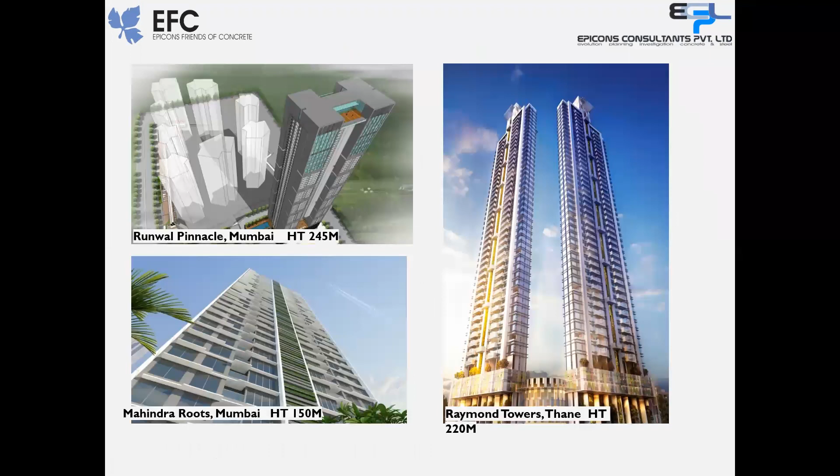Now I would like to introduce you to the director of Epicons, Anand Kulkarni. He graduated in 1987 with specialization in structures, and studied for post-graduation with a specialization in structure at SPCE. He has 34 years of vast experience in the field of structural design of various types of structures - residential, commercial, industrial, malls, multiplexes, etc. His expertise includes designing of tall buildings. He's involved in designing more than 110 tall structures ranging from 100 meters to 250 meters in height for leading developers. He's also a member of the American Concrete Institute. Some of the projects he has worked on are Runwal Pinnacle Mumbai, Mahindra Roots Mumbai, and Raymond Towers Thane.

Now I would like to introduce you to Ravindra Deshpande, sir. He graduated from VJTI Mumbai in 1976 with first class honors and then completed his master's in the same college in 1982. He's been working with Epicons since 1985 and has been the director at Epicons Consultants Private Limited for the past 28 years. He's acted as an external examiner for PG students of Mumbai University. He has attended a training program on seismic design of RCC structures conducted by IIT Kanpur in 2001. He's handled many industrial, commercial, residential, and institutional projects.

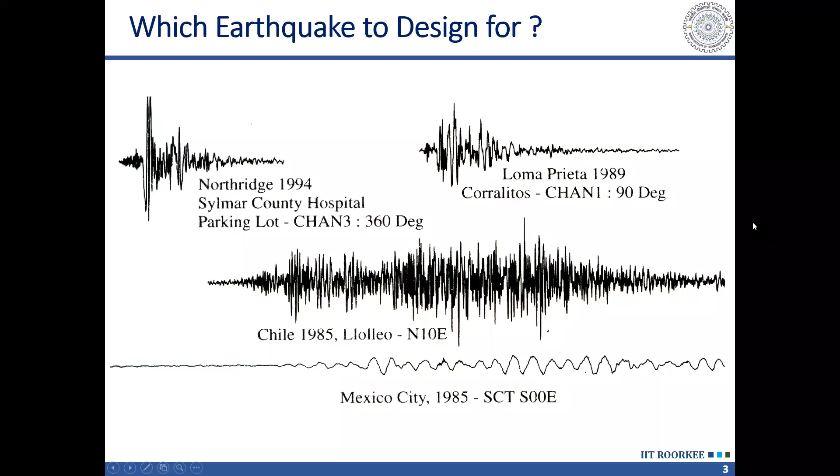This creates a problem for us, which we handle by identifying the major characteristics of earthquake ground motions. There are basically three characteristics which we can use to classify and characterize earthquake ground motions. One is the amplitude of the shaking.

Amplitude of shaking is represented in terms of peak ground acceleration, peak ground velocity, or peak ground displacement. As the term suggests, it is just the peak record. So when recording acceleration at the ground surface, whatever is the peak acceleration recorded, we call it PGA. This is the most important parameter in our design, and is represented by the zone factor in our code. We will talk about this later in more detail.

Then another important parameter is frequency content. If the structure has a period within the predominant frequency range of the ground motion, there will be a quasi-resonance-like phenomenon, and as a result the structure will be subjected to higher response and higher damage. On the other hand, if my structure has its period far away from the predominant frequency range of the earthquake ground motion, then the response will be reduced.

We take advantage of this phenomenon in base isolation, because in base isolation we make our structure quite flexible. We elongate its period to such an extent that it falls outside the predominant frequency range of the earthquake, and as a result much less energy is imparted to the structure.

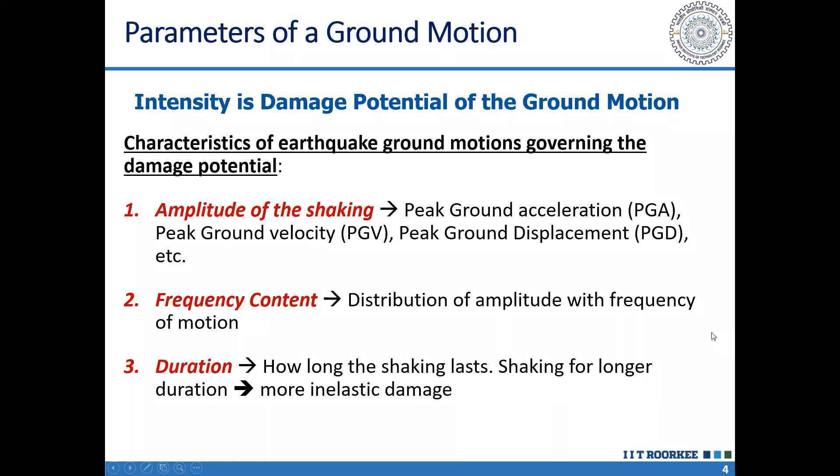The first two characteristics of ground motions, the amplitude of shaking and the frequency content, together can be represented in terms of response spectrum. Most of the time, as designers, we deal with response spectrum rather than ground motions. Codes also provide design response spectrum. The code does not provide any ground motion for which we have to design, but it provides response spectrum.

So a little bit about the theory behind this response spectrum. Response spectrum is nothing but a plot of response of single degree freedom systems, a series of single degree freedom systems. These are the simplest structures. We can think of single story buildings, which can be represented by one mass lumped at one point, having a single mass and a single stiffness.

So these single degree freedom systems are of different periods, shown here by different heights. As the height of the single degree freedom system increases, the period also becomes longer. A taller structure, even if single story, will have a longer period. A shorter structure will vibrate at higher frequency, or with shorter period.

When all these single degree freedom systems with different periods are subjected to the same ground motion, their response is very different, because the response depends on the tuning of the period of the system with the frequency content of the earthquake. As a result, we get a variation of response, and if we plot that variation with period, we get a curve, which we call the response spectrum.

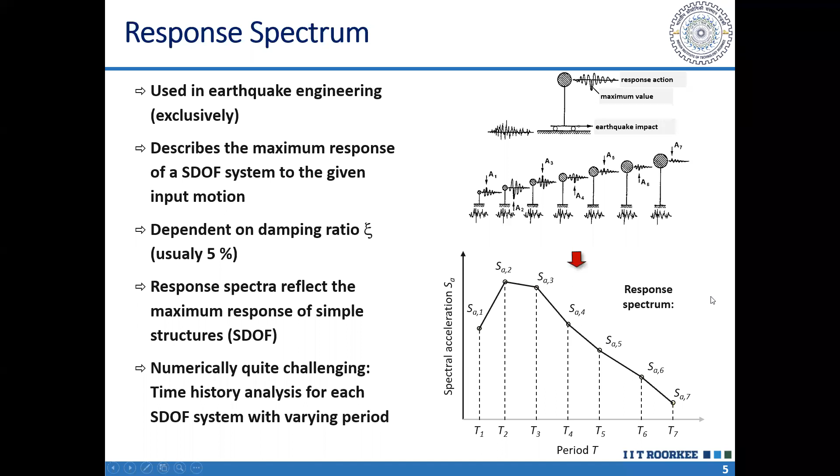How we utilize it for analysis of multi-degree freedom systems, I will talk slightly later. But response spectrum in itself gives us the response of a single degree freedom system, which is something analogous to a single story building. So let us look at the response spectrum, displacement response spectrum, for a single earthquake.

This plot I have taken from A.K. Chopra's book, for the El Centro earthquake. We can see that with period, the displacement of the single degree freedom systems goes on increasing. As we have seen, as the period increases, our single degree freedom system becomes taller, more flexible, and its displacement goes on increasing.

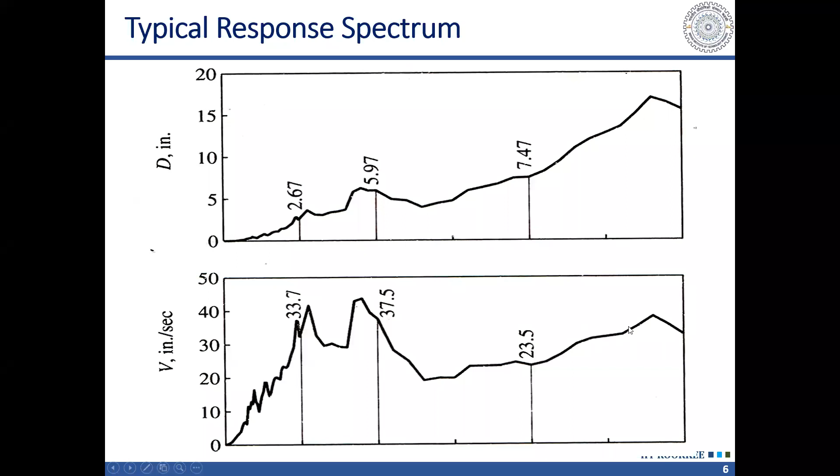This is of great help to us. This phenomenon provided by nature helps us in designing tall buildings, because if this was not decreasing with period - and we will see later it is proportional to 1 upon t or 1 upon t square, meaning it reduces drastically with period - if this phenomenon was not happening in nature, it would have been very difficult to design tall buildings.

Let us say a 60-story or a 100-story building. The design base shear would have been so large that it would have been impossible to design those.

By virtue of this phenomenon, the period or predominant frequency of earthquake is, fortunately, away from the frequency of vibration of our tall buildings. It is more in the range of frequency of vibration of low-rise buildings, so generally our buildings of 1 to 10 or 15 stories are in this range in which mostly the earthquake will have the predominant frequency. So those 10, 12 story buildings are subjected to very high earthquake forces, much higher base shear as a fraction of its weight.

But when we talk about tall buildings, the spectral acceleration reduces significantly, and as a result we get much less base shear despite much higher force, much higher weight of the building, which is nothing but a force due to gravity. This reduction in spectral acceleration with period actually makes it feasible to design earthquake resistant tall buildings.

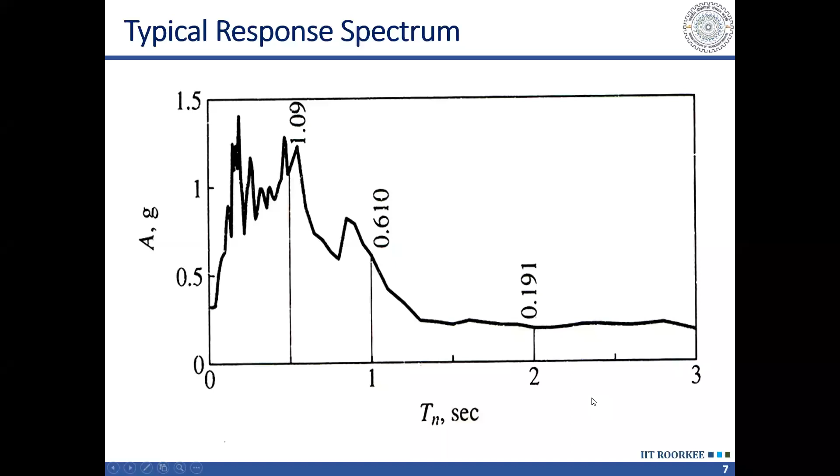Here this value, the response spectrum is having a value corresponding to zero period. So zero period is representing a very rigid structure. A very rigid structure only will have a very high frequency, or period tending to zero. So those structures which are very rigid will have almost the same acceleration as that of the ground. That's why this value, although it is difficult to obtain numerically, is the value which we estimate with single degree of freedom systems having periods very small.

At zero period it is not possible to solve it, but at periods much smaller or close to zero we can do that. These periods we consider, you can see there is a small flat portion shown here in this response spectrum plot, representing a range which is up to 1/33 seconds. So those structures which have frequencies more than 33 hertz, we can treat them as rigid or having zero period, and those structures will have acceleration the same as the ground acceleration.

And that's why this value we call effective peak ground acceleration, EPGA, also called zero period acceleration, ZPA. This zero period acceleration, which corresponds to a rigid structure, is given in the codes, in our code, as zone factor, Z, and that is also EPGA, effective peak ground acceleration. This effective peak ground acceleration depends on PGA, the peak ground acceleration, which is obtained from the peak of the ground motion record.

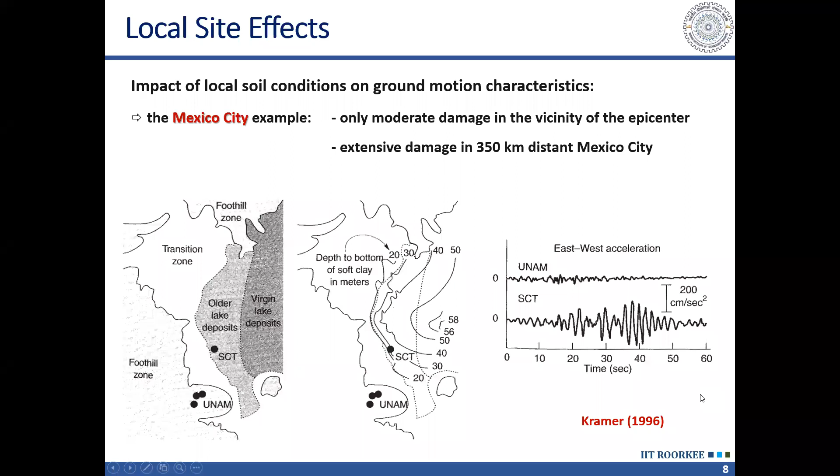It is a much larger increase in the PGA. That is one issue. And when we compare the response spectra of these two ground motions, this is the response spectrum of UNAM motion, and this is the response spectrum of SCT.

What we see here is a peak at 2 seconds. Normally, even what is given in our code, we are expecting the peak to occur at period less than 0.8 second. Even for our site class 3, we are expecting the peak of the response spectrum to occur up to 0.8 second, and beyond that our response spectrum decreases significantly. But here we are getting a peak at 2 seconds.

And this is because of the site period. If we calculate the site period at this point, considering 37.5-meter depth of the soil, we get this period also roughly 2 seconds. So the site period becomes very important.

This is specifically important in case of tall buildings, because tall buildings are going to have period in this range. The low-rise buildings, having period up to let us say 1 second or 1.5 seconds, will skip this peak. Whereas in our conventional design, based on the code-based response spectrum, we are subjecting those buildings to a higher force, and buildings having period corresponding to 2 seconds will be subjected to much lower earthquake force. But the site period can change this scenario drastically.

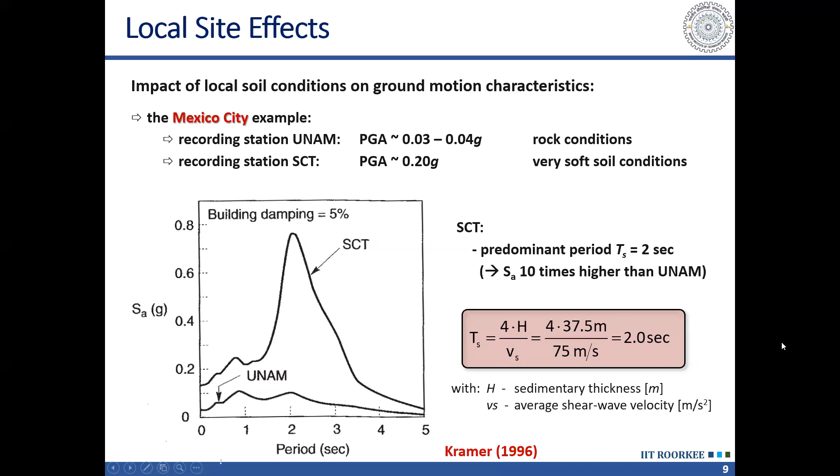So there are some issues which are more relevant, and we have to be more cautious when we are designing our buildings in low seismicity areas like Bombay or Chennai or any other South Indian city. There this phenomena can be even more important.

Now what we see in our code, all of us are familiar with this shape of the response spectrum. I am calling it a shape because it is not response spectrum, it is rather normalized shape of the response spectrum, normalized with respect to ZPA. That's why the value corresponding to 0 period becomes 1.

And it increases, the peak is at 2.5. So the peak spectral acceleration which we are expecting is 2.5 times the ZPA or the zone factor. And this continues up to different periods.

In case of rock, it continues up to 0.4 second, then 0.6 second, and now in our code it has been increased - in the revised code I will show it has been increased up to 0.8 second. After that it diminishes proportional to 1/t up to 4 seconds, and beyond 4 seconds it is assumed to be constant.

Now this portion, 4 to 6 seconds, is a problematic area, because many of our tall buildings will be in this range, and in this range the spectral acceleration is already very low.

So even if we assume it to be constant, most of the times it will be the minimum base shear which is going to govern. So assuming constant acceleration does not affect the forces, but it will affect the displacement drastically, and it may be very difficult to satisfy the interstory drift limits when designing buildings in this range of the period.

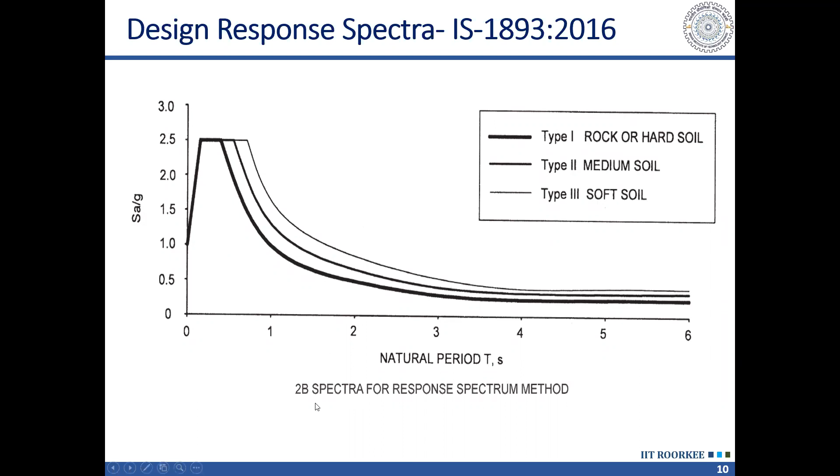Okay, so this is the new response spectrum given in the IS 1893 draft code, which is in wide circulation. You can see here in this revision, the constant part has been recognized up to a period of 0.01 second. So those structures which are very rigid, having period less than that,

in our buildings, it is not of much significance because our buildings will have minimum period of 0.1 second, even for a single story building. But when we are doing modal analysis, some of the higher modes may go in this range. If we have a higher mode with frequency around 33 hertz, that gives 1 by 33 seconds, but our code recognizes this beyond 0.01 second, meaning beyond 100 hertz. So actually this should have been up to 0.03 seconds. Those modes we consider as rigid modes, and the spectral acceleration we consider same as zero period.

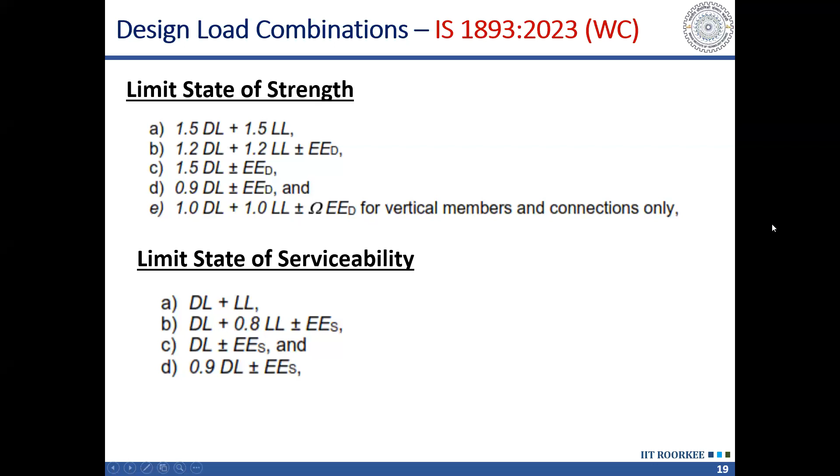This is a table which I have taken from the code. You can see that for normal structures, the strength design, that EED, is based on 475 year return period. And that serviceability check is to be done for 73 years return period. This is the serviceability definition we discussed, having 50% probability of occurrence in 50 years during the design life of the structure. So for normal structures, this is how it is.

For important structures, in place of 475 years, it has been increased to 975 years return period. Earlier we were doing this by applying an importance factor, so now in place of the importance factor, the code is proposing to increase the return period so that the structure will be designed for a higher level of earthquake. And accordingly, its serviceability check will also be carried out for 225 years.

And in case of critical structures - interestingly, hospital related structures, hospital buildings are in this category - there is going to be a drastic change in design of hospitals as per this code, because hospitals are proposed to be designed for 2,475 years return period.

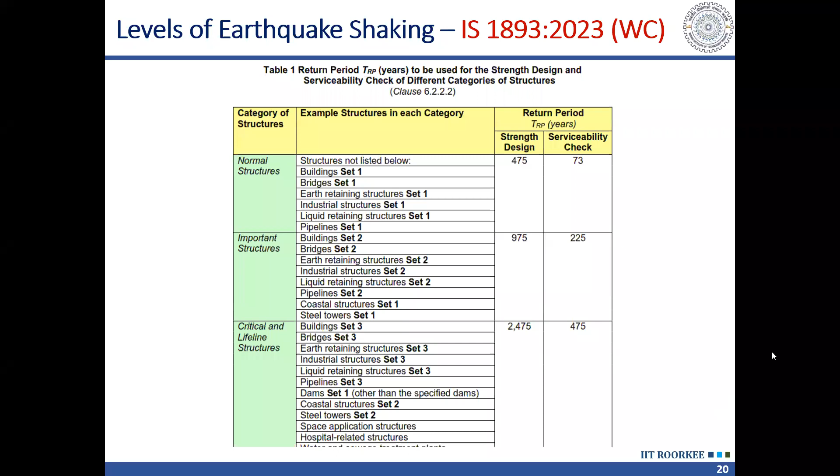Currently, we are designing our hospitals with 475 years return period and an importance factor of 1.5. Now we will be designing it for 2,475 years return period, and the serviceability check shall be made for 475 years return period. So the code in circulation has now defined the return periods corresponding to EED and EES.

The zone factors are also defined with these return periods now. The whole country is now divided into zones. In contrast to the current 4 zones, starting from zone 2 to zone 5, now we have zones starting from zone 2 to zone 6. A new zone, zone 6, has been introduced, and you can see it is somewhat closer to zone 5.

The whole Northeast, earlier in zone 5, has now been put in zone 6. There is also a belt in the central Himalayas region which is put in zone 6, and the Bhuj area is put in zone 6. Then along with zone 6, there is zone 5. This Indo-Gangetic plain, where we have deep alluvium, has been put in zone 5.

Delhi is still in zone 4, so this portion has been kept in zone 4. Mumbai is in zone 3 here, and a small portion here near Koyna, where an earthquake has occurred, has been put in zone 5.

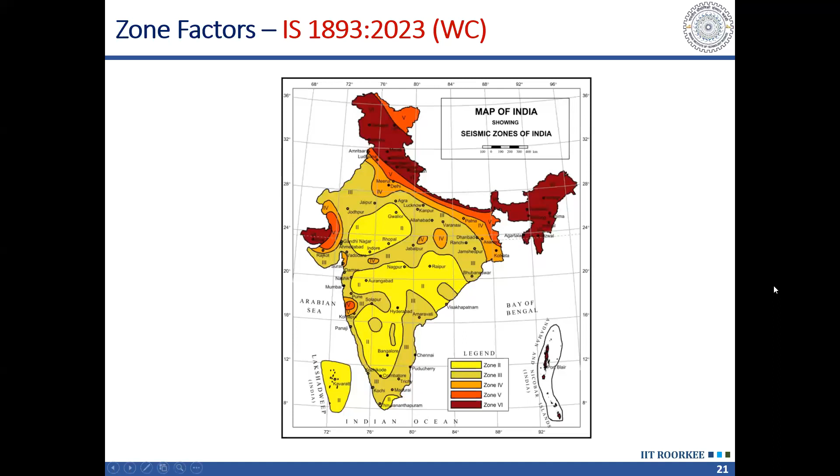And the zone factor for different zones is like this. Please understand that when we are comparing for 2475 years with the current code, it has to be compared with a factor of 1.5. For example, the value of zone factor for zone 5 in the current code is 0.36.

If we have to convert it into equivalent 2475 years return period earthquake, we have to multiply it by 1.5, so it becomes 0.54. So for zone 5, currently it is 0.54, and what is proposed here is 0.6. So it is nearby, it is close. But zone 5 has been now changed.

Where zone 5 is currently, now we have zone 6 at those locations, and many locations which are currently in zone 4 - zone 4 is having a zone factor currently of 0.24. If we multiply that by 1.5, this becomes 0.36.

So some of the portions in the Himalayas, which were earlier, or let us say Bhuj, which were earlier close to zone 4 - Bhuj was in zone 5, but some nearby areas which were earlier in zone 4 and being designed for 0.36, in place of that, will now be designed for 0.75.

So this change is going to occur, and this is based on the probabilistic seismic hazard assessment exercise which has been conducted. As a result of that assessment, it has been estimated that the actual hazard existing in these locations is much higher.

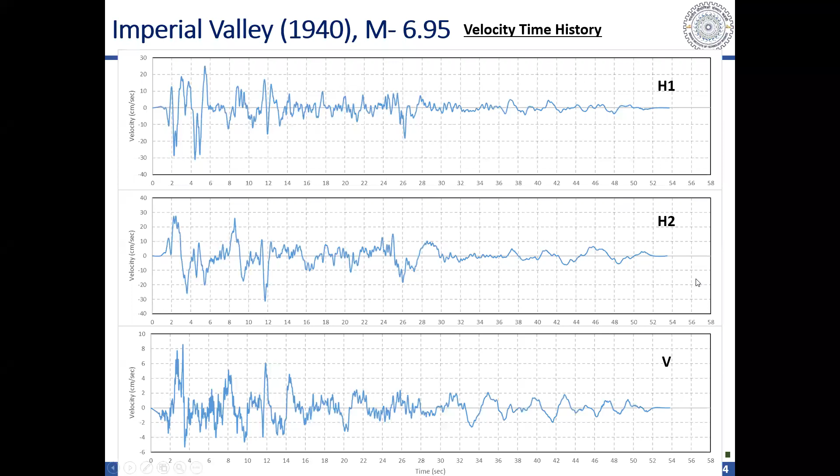Now, this is the velocity time history of the same ground motions. We can see that the velocity is also random, and the peak is occurring in one direction but not the other. But if we look at the response spectra, we can see that response spectra in the two horizontal directions are similar.

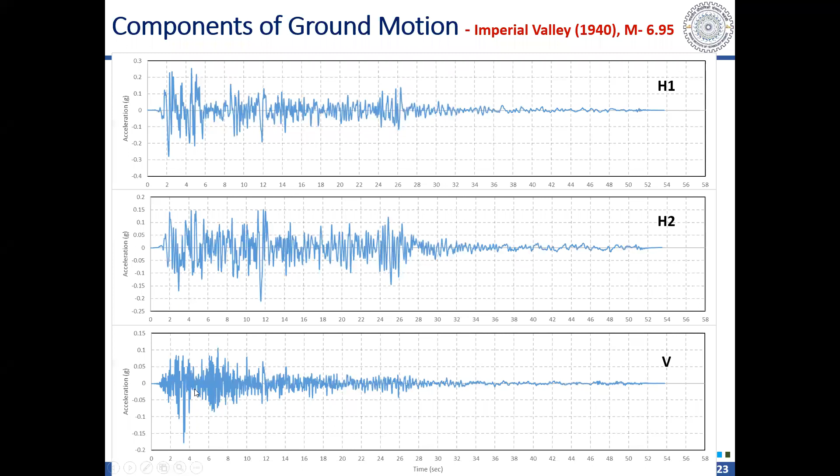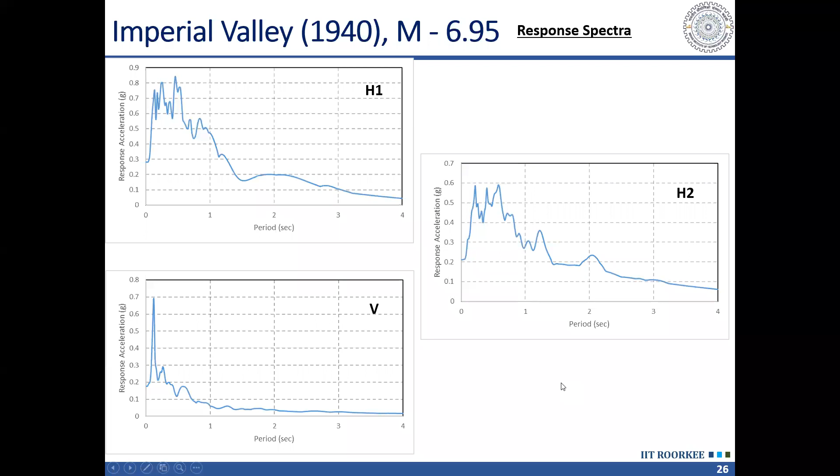In the two horizontal directions, the response spectrum can be considered to be the same, but the time history cannot be taken as the same - that should not be done, because in that case the ground motion becomes correlated and the results will be excessively conservative.

Then coming to these two methods, the types of analysis which we do, for that we have to understand the dynamic characteristics of the building. So far we have talked about the dynamic characteristics of the ground motion. Now we will talk about what happens to the building.

Any building, or for that matter any structure, can be considered as consisting of several modes, and these modes we call natural modes. These can be obtained by performing eigenvalue solution of the stiffness and mass matrix, or what we call free vibration analysis of our building, and we get the different modes, period in different modes, and the mode shape. These typical shapes are here.

In case of first mode, all the masses along the height of the building will be vibrating in the same direction. In case of second mode, half will be vibrating in one direction and half in the other direction, and so on. As we go from lower mode to higher mode, the numbering of these higher modes is done based on the hierarchy or order of their frequency.

So these are simply numbered in the order of increasing frequency, and increasing frequency means reducing period. So as the mode increases from 1 to 3, the period goes on reducing. I have interpreted that by showing shorter structures corresponding to shorter single degree of freedom systems for higher modes. So we can see as the height is reducing, the period is reducing, and the frequency is increasing.

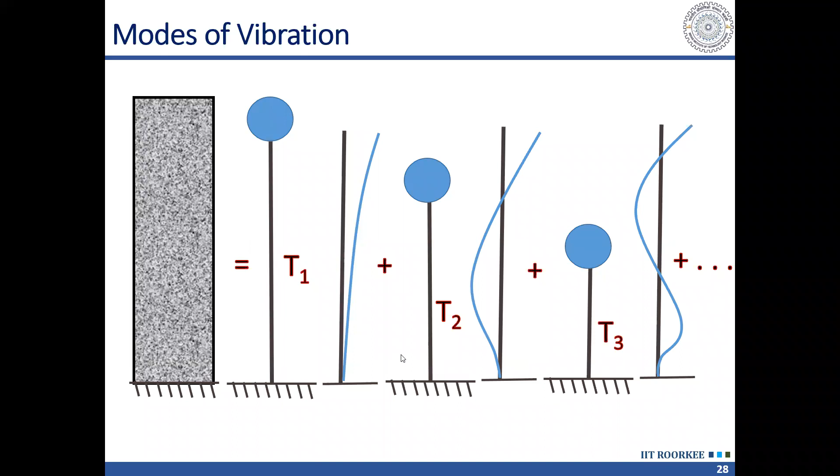So what we do is we first have to obtain these mode shapes and the corresponding frequencies.

Now, you might have seen in some literature, and some of you may even be using, two options available in the software: one is the eigenvector, another is the Ritz vector. We can perform this modal decomposition or modal analysis using either of these two options. In fact, more types of vectors are available.

For decomposition, we utilize one characteristic of these sets of vectors, either eigenvectors or Ritz vectors, and that characteristic is that these are orthogonal to each other. So eigenvectors are a set of vectors orthogonal to each other, and Ritz vectors are also a similar set having vectors orthogonal to each other, and we can utilize both to perform modal analysis.

But eigenvectors have an advantage in that they represent physical properties of the building, and those physical properties are the frequencies and mode shapes in different natural modes, or what we call the free vibration characteristics of the building.

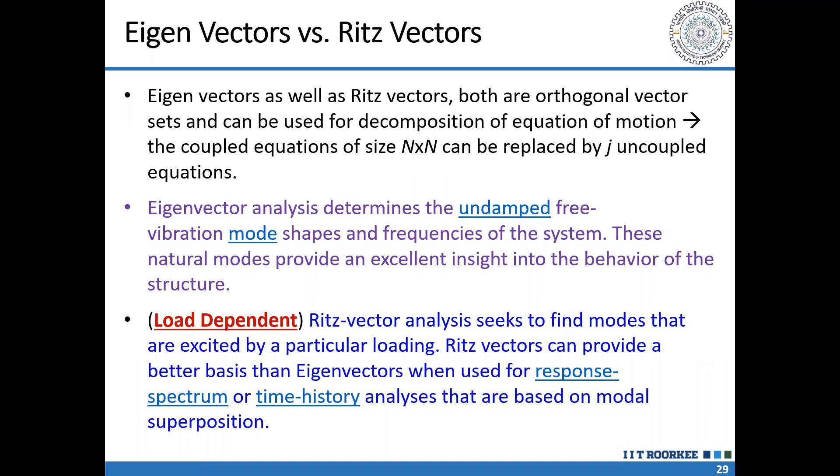So as far as the solution is concerned, both are acceptable. You can use any of the two, whichever serves your purpose. But for the physical understanding, it is important that we do eigen solution also and look at the eigenvectors, mode shapes, and the frequencies. That will give us a lot of physical understanding about the behavior of the structure.

When eigenvectors are not giving us sufficient mass participation, we can go for Ritz vectors. In some cases, Ritz vector can provide a better participation factor, and it will require a smaller number of modes, and hence it can make our analysis faster. That's why some of the softwares recommend using Ritz vector in every case. It can be done, there is no problem with that. But in addition, it is important to do eigenvector solution also and look at the eigenvectors, whether those are reasonable or not.

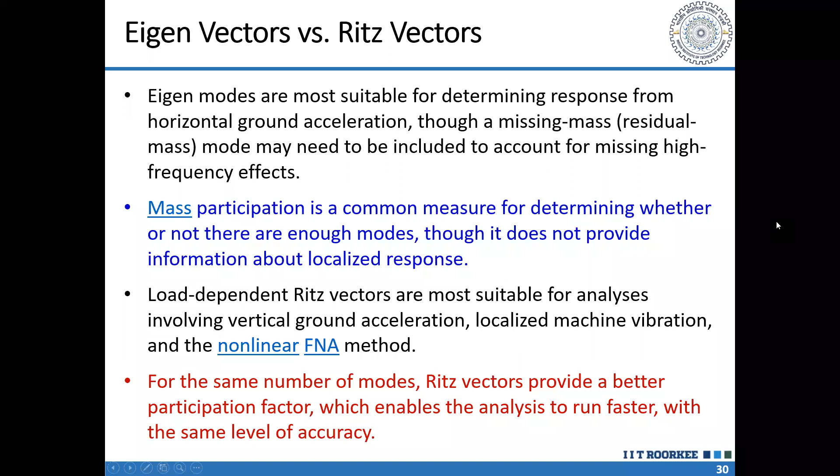Then there are different types of analysis depending on how many modes we are considering. If we consider a single mode, we can obtain a good estimate, though this is an approximation since any structure consists of several modes and we are considering only one. So if I assume that the whole mass of the building is participating in the first mode itself, I can read the spectral acceleration from the response spectrum corresponding to the first period, get that value, and then calculate base shear corresponding to that. This method we call equivalent static analysis.

So equivalent static analysis is nothing but single mode analysis. We are assuming that the whole mass of the building is participating in a single mode, that is the first mode, and the response we can get directly from the response spectrum. Generally this is a conservative method because we assume the whole mass is participating in the first mode, so we get conservative results, but in some cases it may be non-conservative as well.

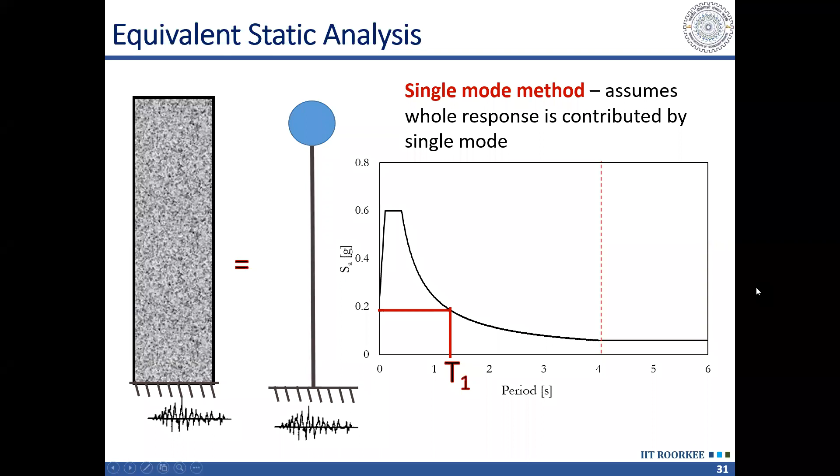Then we have what we call response history analysis. In response history analysis, either we can analyze our building as a whole subjected to the ground motion, or instead we can analyze individual single degree of freedom systems corresponding to each mode, subjected to the same ground motion for which we want to analyze our building. Then we can get the response of each single degree of freedom system and add these responses directly.

Only thing is we have to keep in mind that a single degree of freedom system will give us one response, whereas in a multi-story building there will be response needed at every story. So the response at every story can be obtained by multiplying this response of the single degree of freedom system by the corresponding mode shape, and also by the corresponding mode participation factor.

And then we add it, so we will get the response of the building. Now, alternative to this, we can obtain the response of the building directly. That is what we call the direct response history analysis or direct time history analysis.

Time history analysis can be done in two ways. Either the equation of motion can be solved directly. Those familiar with the mathematics behind vibrations of a multi-story building know that we get coupled equations represented in terms of matrices. We can solve that coupled differential equation directly in terms of matrices - this is called direct time history analysis, and it is the most accurate analysis.

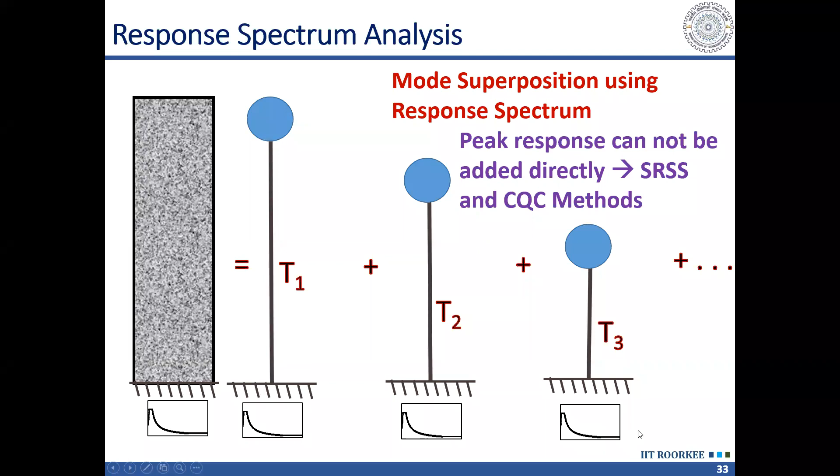The most accurate method, as I just discussed, is to make a multi-degree freedom model of our building and analyze it directly - we call it direct time history analysis. All the modes are inherently considered, so we need not worry about how many modes we need, because in some structures it will not be possible to get 90% mass participation, especially for buildings with basements. It will not be possible to excite 90% mass, or if we want to get that, we will need a very large number of modes, and some of those modes may be rigid, so we may not even be able to solve that.

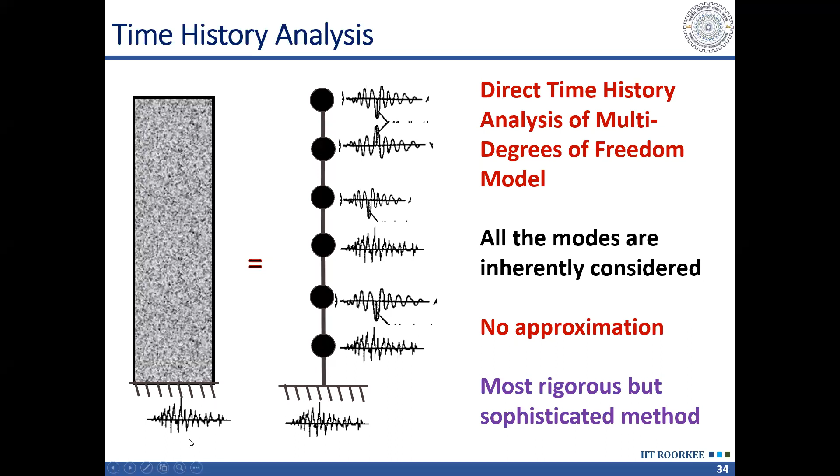So the possibility of getting 90% mass participation may be difficult, and in such cases we can go for direct time history analysis. No approximation is involved here - we are considering all the modes, and this is the most rigorous and sophisticated analysis. The problem is how to get the time histories, because this requires time history data, whereas the code only gives us the response spectrum.

So this question is always there - whether we should use response spectrum analysis or time history analysis. It is not necessary to perform time history analysis. Response spectrum analysis is also accurate - it is quite an accurate method. Only one condition is there: that we have an adequate number of modes.

If we are able to identify an adequate number of modes having more than 90% mass participation, either using eigenvector solution or using Ritz vector solution - any of the two methods we can utilize - if we can achieve 90% mass participation, the response spectrum method is good enough. It will serve our purpose.

But in some cases, like irregular buildings, or buildings where we want to consider soil structure interaction including wave propagation, we need to perform time history analysis, because it may not be possible to have 90% mass participation. So there we have to go for time history analysis. In case of response spectrum, we use the 100:30 combination, whereas in case of time history analysis, you apply two orthogonal components simultaneously, and generally the vertical component should also be used simultaneously, rather than this 100:30 combination.

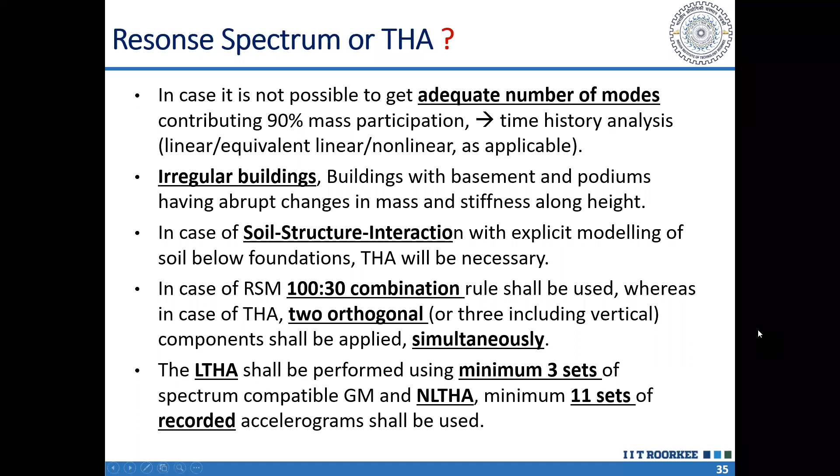In case of buildings having special seismic devices like base isolation or dampers, we have to go for nonlinear time history analysis, or at least equivalent linear time history analysis. In equivalent linear time history analysis, we can perform iterative linear time history analysis. Because we have a nonlinear load displacement behavior, we assume certain displacement in our device, calculate the secant stiffness corresponding to that displacement, and using that stiffness, perform the linear analysis and check at the end whether the assumed displacement was close enough to the displacement obtained after analysis. If not, it has to be revised and iterations are to be performed.

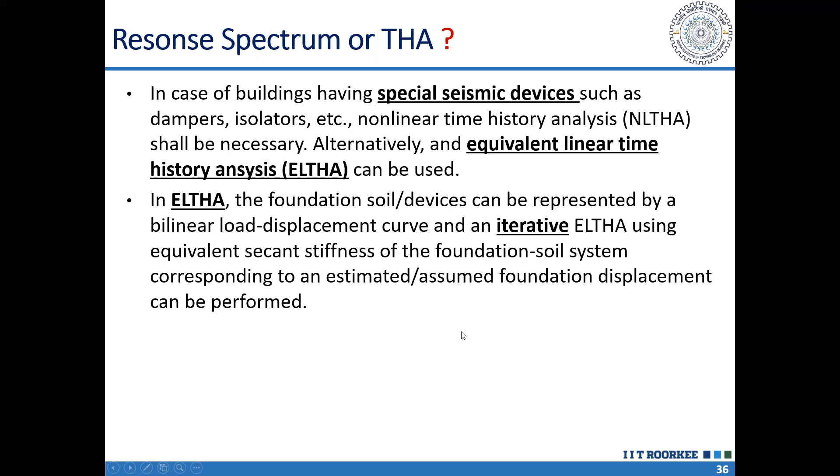Now, as I said, the major problem in case of time history analysis is selection of ground motions. How to get the ground motions? There are 3 types of ground motions available. One is the recorded accelerogram, which we can get from the records of past earthquakes. A number of websites have different records for past earthquakes available. I have a list of those which I will share with you.

Then we have simulated accelerograms using the physical phenomena of source and path mechanism. People are trying to generate these accelerograms, although it is not very successful. We do not get simulated accelerograms which have characteristics similar to natural recorded accelerograms, so it is still not very popular.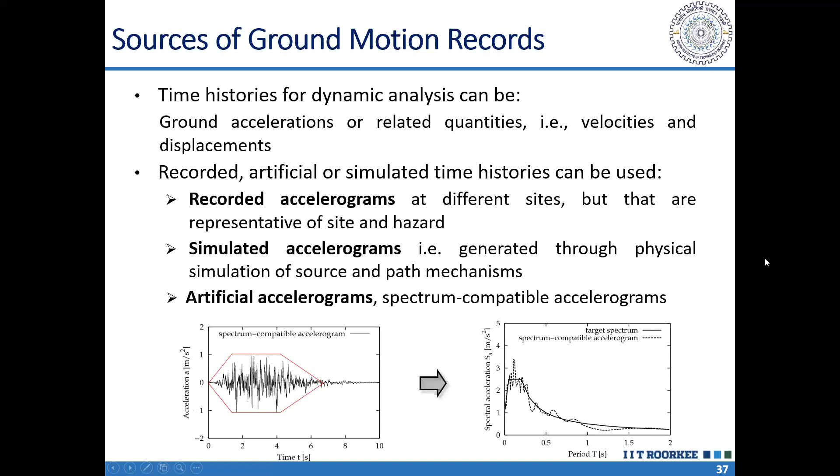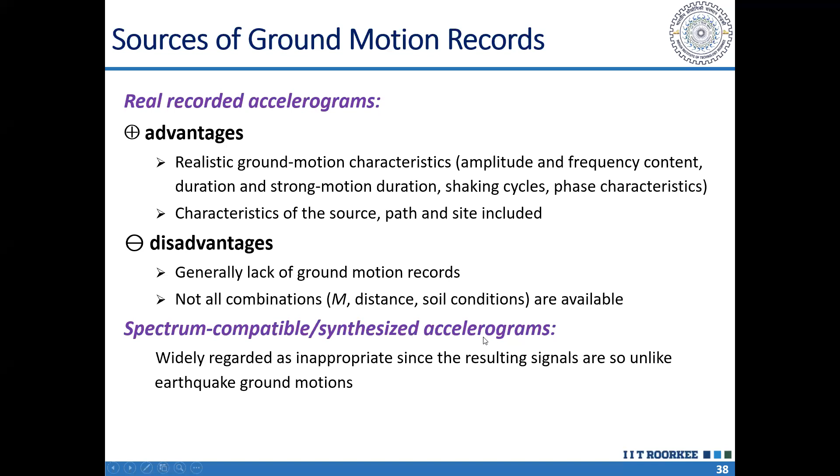So there are advantages and disadvantages. Definitely the realistic recorded ground motions are very good, but the only problem is that such ground motions are not always available. If you are lucky, you can get ground motions which are very close to the response spectrum you are trying to select for, but generally these will not be available, and in that case we have to go for spectrum compatible or synthesized ground motions.

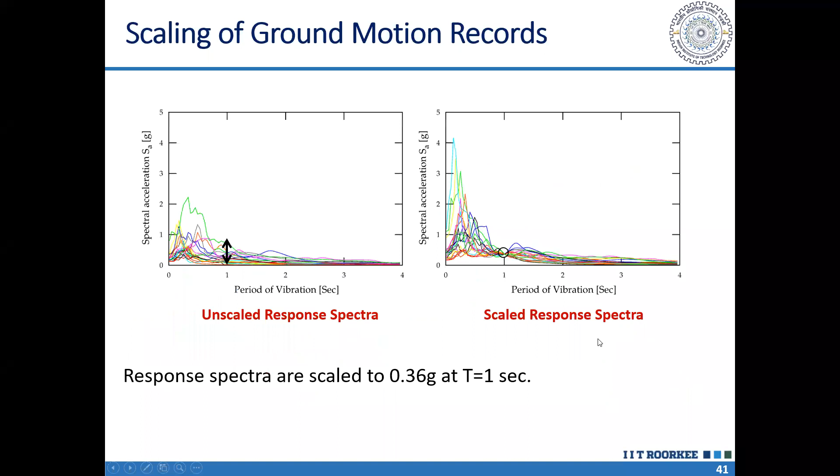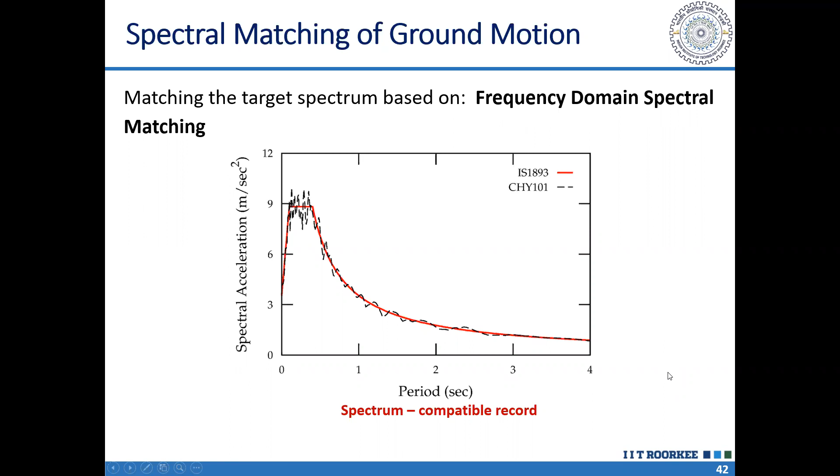We have to keep this variation in mind. Either we reduce this variation by doing spectral matching, or we consider a sufficient number of ground motions, and the mean and standard deviation of those ground motions is to be considered while making a decision regarding the design.

There are a number of strong motion databases from where you can get records. In India, our department manages this website, PESMOS. You can register and download time histories recorded in India. The most important one is NGA West 2, maintained by UC Berkeley. Most ground motions you will get there, and they have a very good search engine where you can specify the period, and the website will search and provide ground motions matching your criteria.

You can specify the response spectrum, the magnitude range you're looking for, the distance, even the site type or shear wave velocity VS30 at your site. The search engine has been designed so it will provide the ground motions having the best match with your search. So the most commonly used website is this NGA West 2.

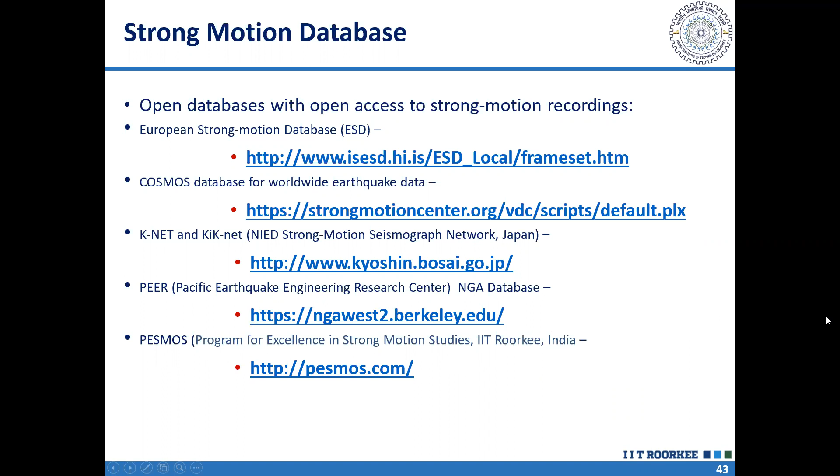There are software tools which can help you match ground motions with a target response spectrum. Some are available in open or public domain, some are proprietary. Seismomatch provides a student or teaching version and a commercial version. The commercial version gives a much better fit, whereas in the student version there is a limit on how close you can do spectral matching of your ground motions. You can download this from these web links and use it.

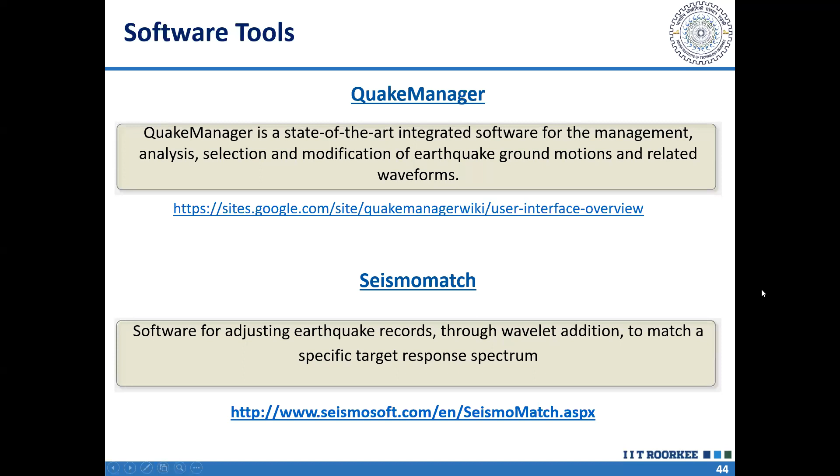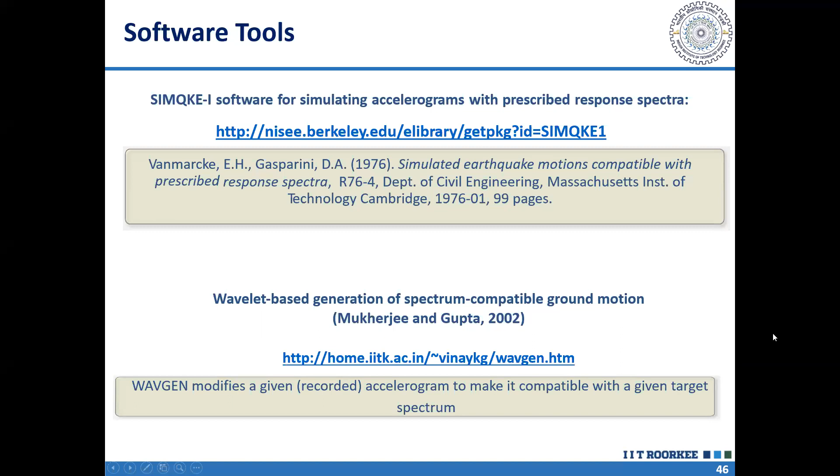There are other software tools as well. One spectral matching tool has been prepared by Professor Gupta at IIT Kanpur. SIMQKE is also a sophisticated tool, available in the public domain. The only thing is that this is command based, you will not get a GUI for this, but those who want to use it for research purposes can use this tool for spectral matching.

So this is about response spectrum and time history matching, and time history analysis of tall buildings. Now I want to take up some modeling issues since I still have time. Can I continue for another half an hour? Kulkarni sir, yes you can continue. Okay, so I just want to discuss some very common issues which are troubling our designers and what to do about those.

One problem is how to perform analysis of buildings with basement and podium. In such buildings, generally the stiffness of the basement and podium is higher, whereas the tower stiffness is lower. Further, with the same basement, multiple towers may be arising. So in such a case, what should we do?

If we try to perform the analysis of the system as a whole, that is also possible. We call it single stage analysis. But in single stage analysis, the problem is that it is difficult to excite the bottom rigid portion, so you have to consider a large number of modes so that you get 90% mass participation. If you are not able to do that, you have to do a direct time history analysis.

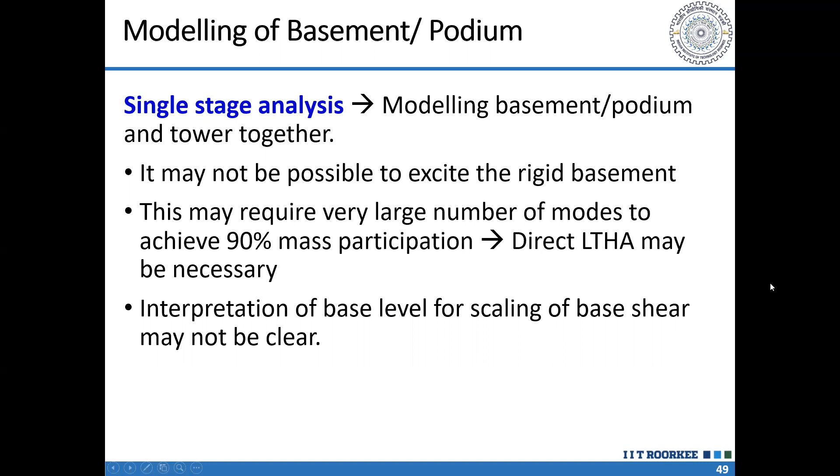In direct time history analysis, we analyze the full model by applying the ground motion at its base, and all the modes are inherently considered in this analysis. Otherwise, if we are doing modal analysis, we have to ensure that those modes which are participating within 90% mass participation are all considered.

Now, two types of analysis are possible here. In one case, we can model the tower and the basement together, and apply the ground motion at the base of this basement. We are not considering the effect of soil here at all. Although the basement is inside the soil, we consider that the ground motion is applied at the base of the basement at the foundation level, and the surrounding soil is ignored in this analysis.

The effect of soil, however, is to be considered while designing the retaining walls of the basement, where we have to consider both static pressure and dynamic earth pressure. We get static earth pressure if the retaining walls are part of the structural system itself, meaning the top of the retaining walls is also connected to the floors. In that case, we have to consider the pressure at rest.

But if this wall is cantilevered and not connected to the structural system, it will be designed for active earth pressure. Then the dynamic component of the earth pressure will also be calculated using the Mononobe-Okabe rule, and we have to design the retaining walls for both. So the effect of the soil will be considered in designing the retaining walls. Otherwise, while performing the analysis we can ignore that, but we have to model the basement, including its rigid walls.

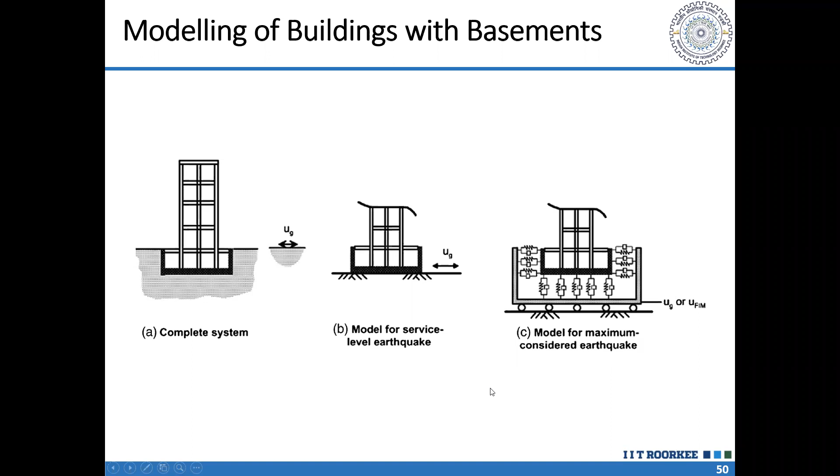But the problem here is, as I explained earlier also, that it may be difficult to mobilize the mass of the basement. And especially if the building is having several stories in basement, the mass in the basement may be significant, and it may be difficult to achieve 90% mass participation with reasonable number of modes. In that case, we can go for two-stage analysis.

In two-stage analysis, the tower portion is analyzed separately, and the basement portion is analyzed separately. And for the tower portion, we can perform dynamic analysis, either using response spectrum or time history. We can perform a separate analysis for the tower, assuming the tower to be fixed at the top of the basement or the podium. So the tower portion can be analyzed separately, and the basement portion can be analyzed separately.

The analysis of the basement will be done using equivalent static method. Here we will use a static method, and because it is rigid, depending on in what period range we are getting the period of vibration of the basement, we will read the value which will be either equal to Z or 2.5 Z or somewhere in between. Most of the cases it will be very rigid. The period of vibration of the basement will be less than the corresponding cutoff.

In that case, we can simply use the value at ZPA, at zero period. That value of SA we can use. But for this method to be valid, there are certain conditions. This method can be used only if the stiffness of the lower portion is much higher, at least 10 times the stiffness of the upper portion.

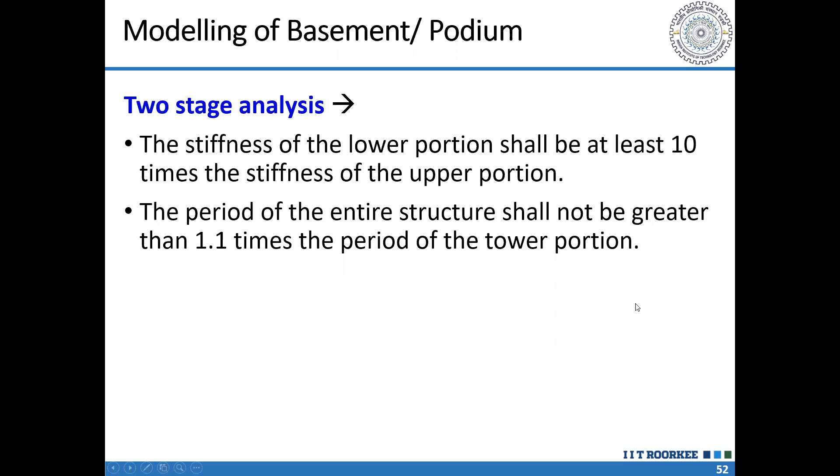In addition to these, we have to apply the soil pressure on our retaining walls. Now, another issue is how we should model shear walls, and how we should consider the forces in the shear wall in design.

So two types of models, both equally acceptable, are available for modeling of shear walls. One is the equivalent frame model, or what we call the wide column model. Here the shear wall, if it is a planar shear wall, can be represented by a single column, and that column will be assigned the section of the shear wall.

If it is a non-planar shear wall, let's say in this case it is a C-shape or U-shape shear wall, that can also be represented, or analyzed, using the wide column or equivalent frame model.

So here each of the flanges will be represented by separate columns, and the web will be represented by a separate column. These will be interconnected through rigid arms. When we model a shear wall using a wide column, it will be represented by a line along the centroid of the shear wall. But the width of the shear wall needs to be considered in our model, and we will do that by providing rigid members in the horizontal direction, or we can use the offset command wherever applicable.

In case of non-planar shear walls, we can still use wide columns, but these columns need to be interconnected through rigid arms in each direction.

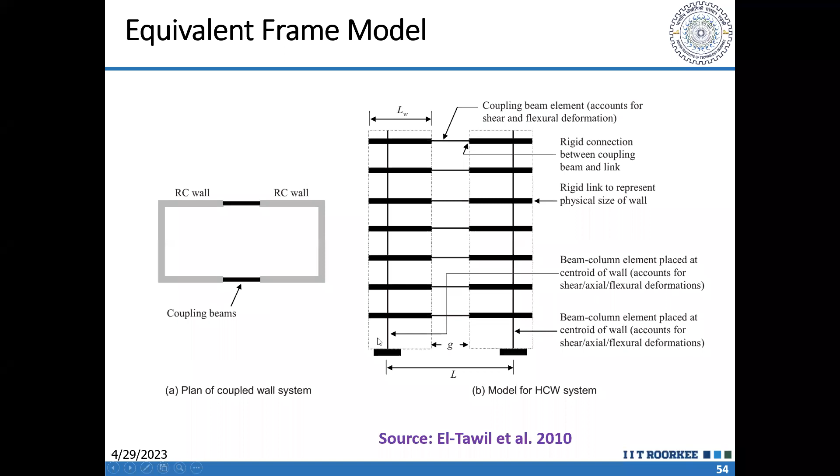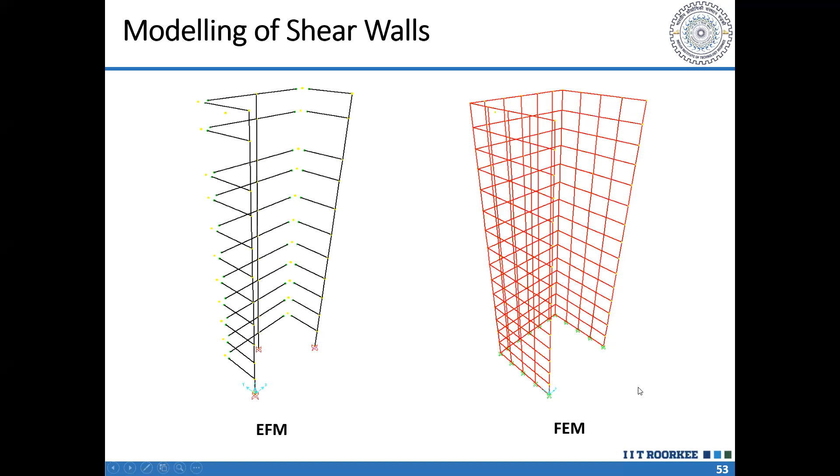So we can see a rigid arm connecting the column. Either this column represents the flange, or this column may represent the whole C-shaped wall—I can lump it into one column. When lumping this whole C-shaped wall into one column, I will get the total bending moment, shear force, and axial force on this C-shaped wall. When doing finite element modeling, I also have to finally obtain the bending moment, shear force, and axial force on the whole section by integrating, and software provides that facility to integrate the forces over a section.

Then there are some more issues in design and detailing of shear walls—there are some limitations of our current code that I want to highlight.

We have to understand how the bending moment of a shear wall changes during an earthquake. When the earthquake level is low, the shear wall behaves more or less linearly, and the bending moment diagram is like that of a cantilever.

The shear wall will behave like a cantilever, and the bending moment diagram will be like this. But as the intensity of earthquake increases, the shear wall will yield at the base, where we are having the maximum moment.

And if the intensity increases further, yielding at the base increases, and the boundary conditions of the shear wall change, so the bending moment along the mid height starts increasing. Initially the shape was linear, but now it goes on changing, and the maximum bending moment tries to occur along the mid height of the shear wall.

Now when we are designing a shear wall, we either have to recognize that the flexural hinge can form at mid height also - that is one possibility, that we recognize where our second hinge is going to form. Of course the first hinge forms at the base, then a second hinge may form here, and in that case we have to do ductile detailing there also.

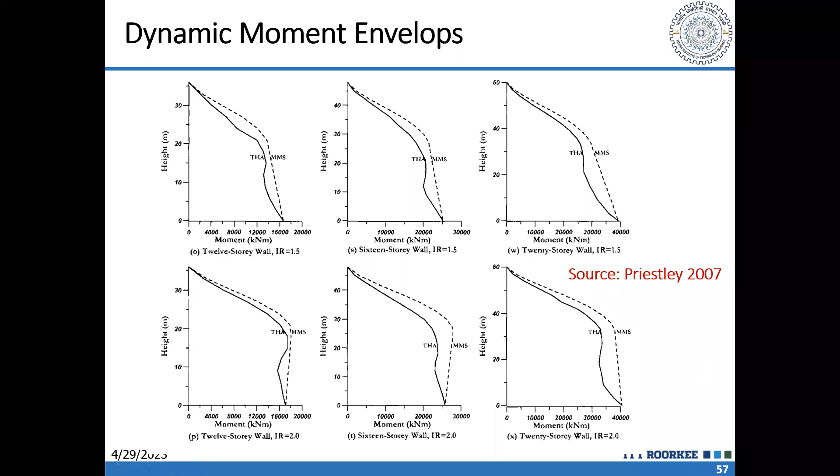Alternatively, we limit our ductile detailing to the base, but we ensure that the plastic hinge does not form at mid height. To ensure that, we have to do capacity design. Now, capacity design of shear walls is not given in our code at the moment, so we have to refer to ACI 318.

I have taken this figure from ACI 318. It suggests that when we are designing a shear wall, its moment envelope has to be amplified and the shear envelope has to be amplified, and the factors by which they should be enhanced are given in the code. ACI 318 provides these factors.

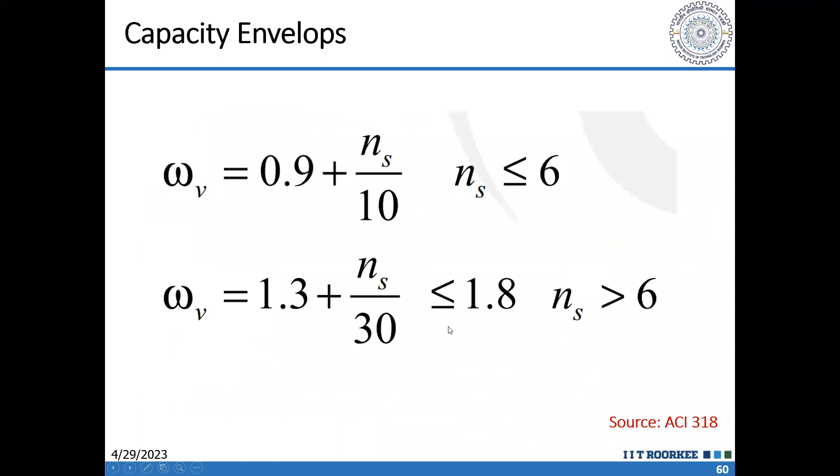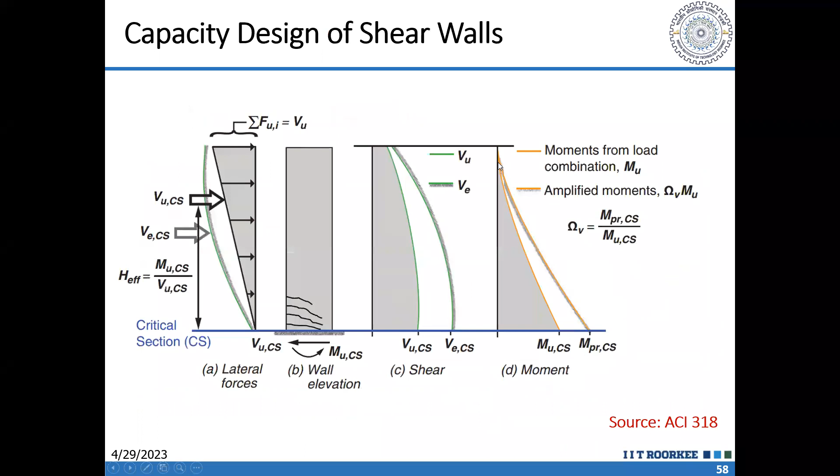We can follow those, but what Priestley has suggested is that even that is not adequate - this moment envelope given in ACI 318 is also not adequate. So what should be done?

The moment at the base, whatever we get after amplification using ACI 318, should be continued up to a critical height, and after that it should be reduced, and our shear wall should be designed for this moment envelope. Only then can we ensure that the plastic hinge will form at the base and not in the middle. Otherwise, what will happen?

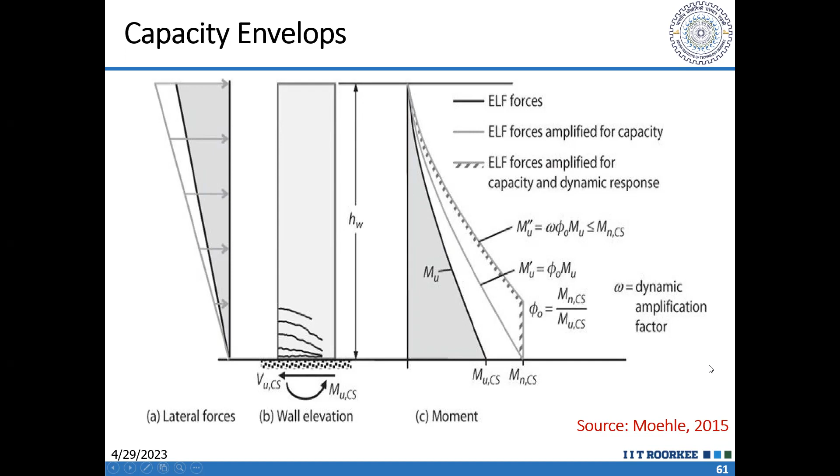If we are not designing for this increased moment, then first our shear wall is going to yield at the base, and then it will yield somewhere near the mid height. And when it is yielding at the mid height, we have to ensure sufficient ductility, so there should not be any brittle failure under the yielding near the mid height. So we have to ensure that ductile detailing is there throughout the height, or at least near the hinge where we expect it to form at the mid height.

Then another common confusion is regarding the boundary elements. Whether we have to provide boundary elements, and if so, what should be their extent? And in the boundary elements, do I need to confine the reinforcement? Do I have to concentrate the reinforcement? Do I have to provide more reinforcement, or can I continue the same reinforcement and then confine it at the ends? For this also we have to understand the theory behind it, what is actually happening.

When a shear wall is subjected to lateral force and is yielding near the base, here the cracking pattern of two shear walls is given. In one case, the reinforcement is concentrated, with higher reinforcement provided near the boundary. In the other case, the same reinforcement is provided throughout the wall - we know the minimum reinforcement in the shear wall is much less, 0.25%, whereas the concentrated reinforcement is controlled by the column minimum reinforcement, which is 0.8%.

So whether we provide minimum 0.8% reinforcement along the boundary or 0.25% reinforcement throughout, the cracking pattern is very different. With the lower reinforcement, a single crack occurs, whereas with the higher reinforcement of minimum 0.8%, distributed cracking occurs. As a result, the ultimate curvature and ductility available in this case is much larger compared to the other.

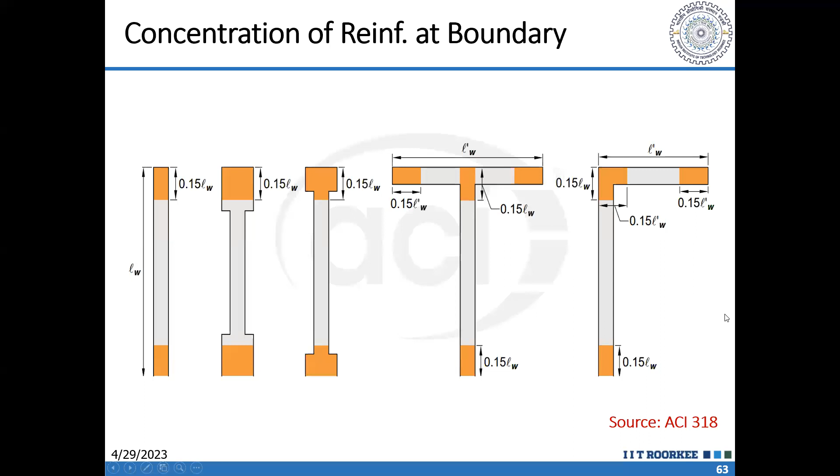The confinement is coming from a different criteria, based on the strain. In IS 13920, when our code talks about the boundary element, it is talking about confinement coming from the stress we get on the uncracked section. We calculate the stress on the uncracked section, and if it is more than 0.2 FCK, we have to provide confinement, for all concrete subjected to strain more than 0.0035, because unconfined concrete can take a maximum strain of 0.0035. After that it will fail.

But during an earthquake, the concrete is subjected to much larger strain, up to 2%. So all that portion of concrete subjected to strains higher than 0.0035 should be confined. Now, how do we identify that portion which will be subjected to strain larger than 0.0035?

The code gives a simpler approach for that: we perform analysis of the building assuming the section to be integral, without considering any cracking. Considering the whole gross section, we calculate the stresses using simply P by A plus minus M by Z. Wherever the stresses exceed 0.2 FCK on the compression side, that portion should be confined.

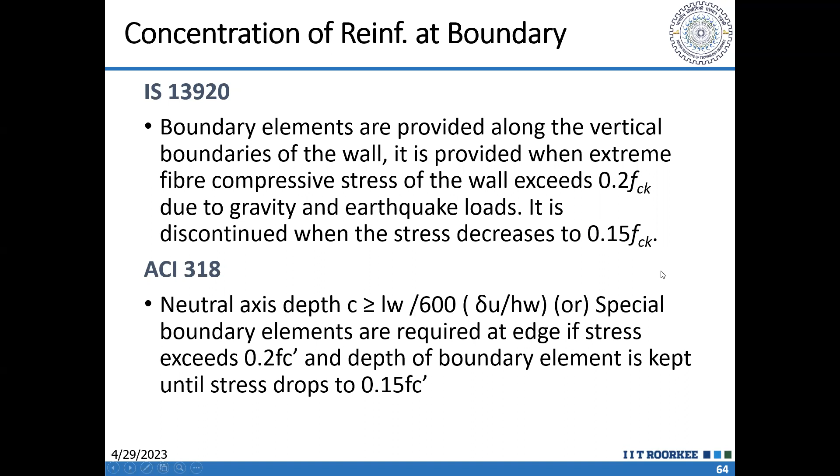Regarding the detailing of boundary elements, I think our designers are clear, there is not much confusion. It is to be detailed as per code requirements for columns. So the minimum reinforcement will be 0.8%, and the confining reinforcement will be calculated using column requirements.

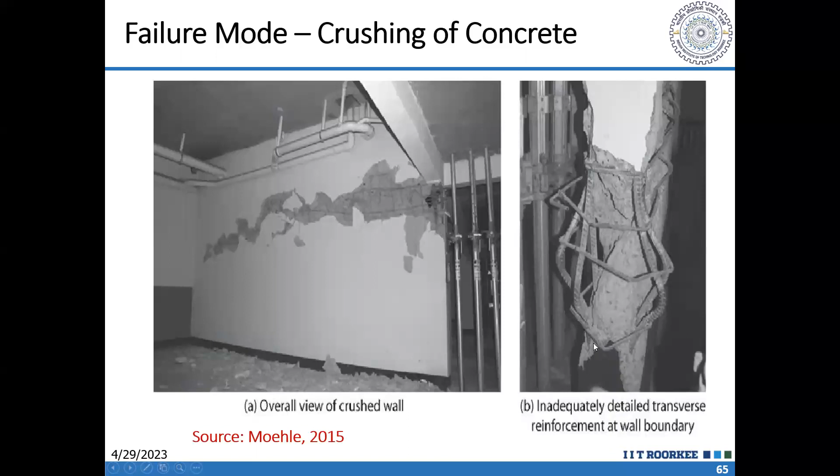Another problem we face, where we don't get sufficient guidelines, is especially in masonry infill type of construction, where the walls are quite long and the stresses may come out to be less. People may not provide confining reinforcement and concentration of reinforcement, but there the crushing of concrete can occur. So wherever this crushing of concrete is occurring, we have to provide adequate confinement. So even when using long, thin, lightly reinforced shear walls, providing boundary elements in 15% of the length at each end is important, and we should provide this confinement there.

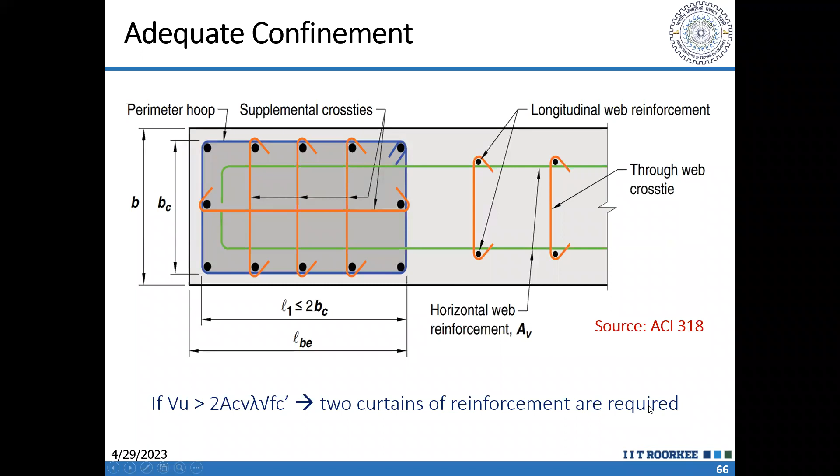Then another problem is the thickness of the shear wall. Especially again in this type of construction, we are providing very thin shear walls.

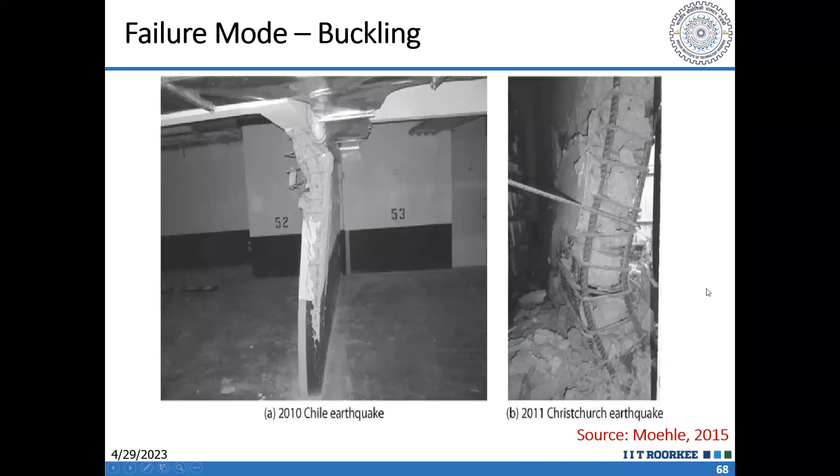This has been observed during past earthquakes. This photo is from the Christchurch earthquake, taken from Priestley's book. There the shear wall has buckled as a whole, and when a shear wall buckles as a whole, it loses its moment carrying capacity. So a minimum thickness has to be used.

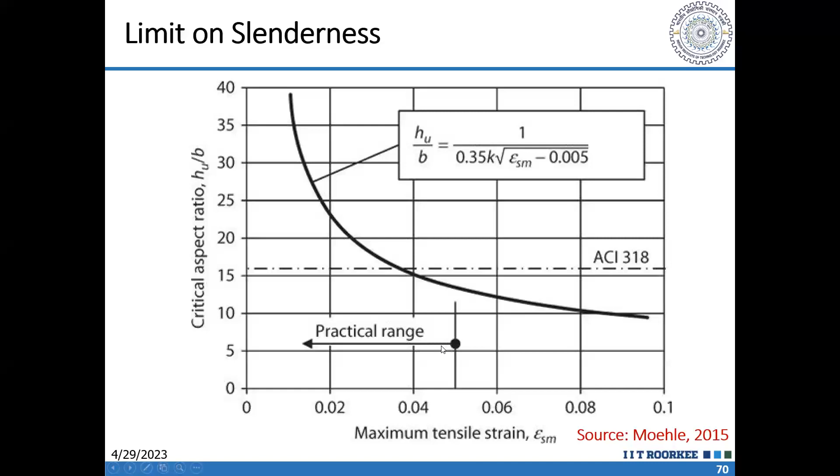Priestley has provided this chart comparing different requirements, and it depends on the strain we get in the steel. Epsilon SM is the maximum strain in steel during an earthquake, and you can see this strain is much larger, of the order of 2%, 4%, 6%. Generally we do not allow strain more than 5% in steel, because the earthquake is cyclic in nature, so there is a phenomenon of low cycle fatigue. So the maximum strain permitted in steel in tension is 5%. This is the range we will be having, and based on this range, different suggestions have been made.

Priestley has suggested that shear walls should have HU by B less than 10 within the hinge region, and less than 16 elsewhere. So at least in the lower few stories, the aspect ratio - height to thickness of the shear wall - should be less than 10. That means if we are using a story height of 3 meters, the minimum thickness should be 300 millimeter as per this clause, in the region where we expect the plastic hinge to occur. In the top portion, it can go up to 200 millimeter.

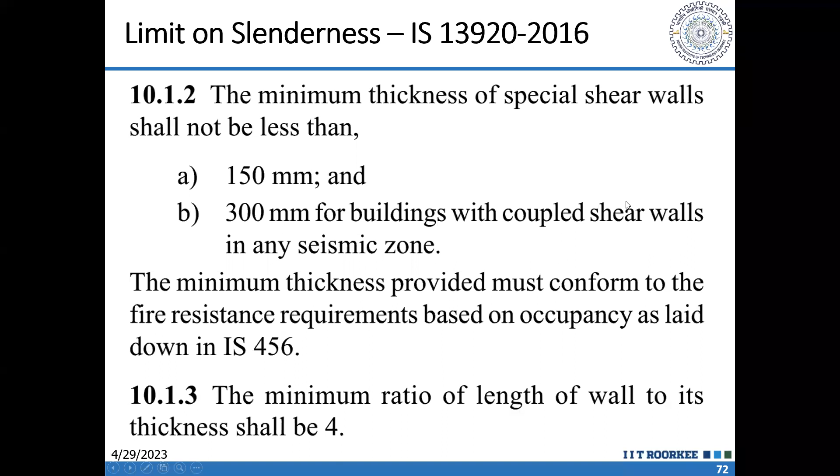Eurocode specifies 200 millimeter, and our code specifies 150 millimeter and 300 millimeter for buildings with coupled shear walls. This 150 millimeter is already on the lower side compared to other recommendations, and sometimes people provide shear walls even thinner than this. That type of shear wall cannot be considered a structural shear wall. At least our structural shear wall should have adequate thickness and boundary elements. Invariably, in the lower portions, we should provide the boundary elements.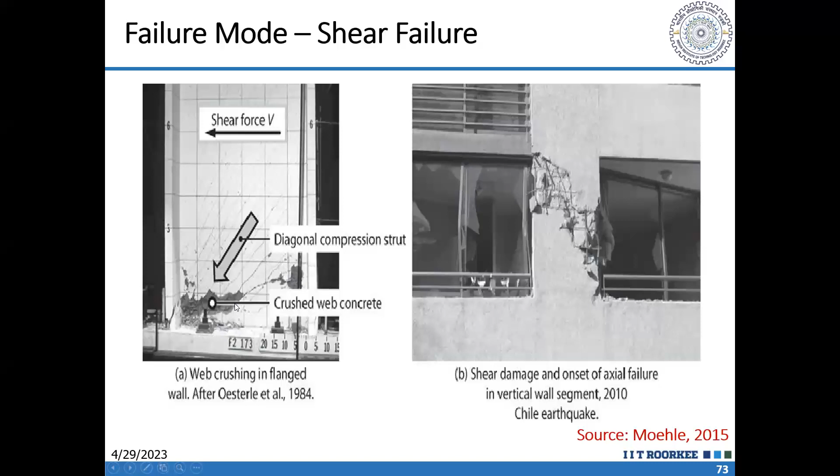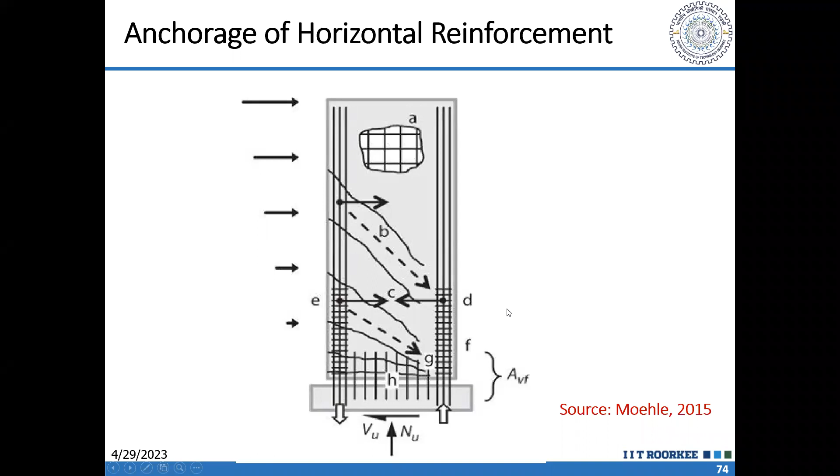Then there are some very small detailing related problems which we make, leading to catastrophic failure in case of shear walls. In a shear wall, very high shear force is attracted and transferred to the ground. Initially the failure was initiated by flexure and crushing of the concrete, and then later the failure occurred due to shear. This failure was actually occurring because of the slip of the horizontal reinforcement, which our code does not give any attention to in the detailing requirements.

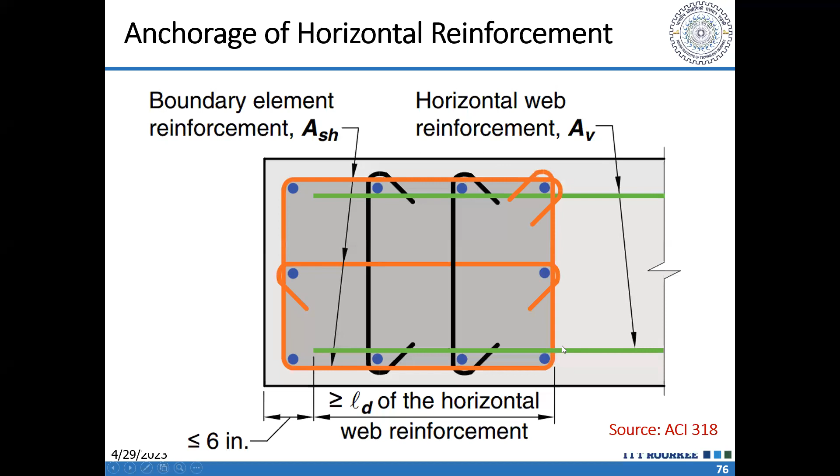But ACI 318 has this recommendation that the horizontal reinforcement needs to be anchored properly into the confined core region. If we keep the horizontal bars straight, it should be anchored up to LD in the confined core, in the boundary element - it should go up to LD. If we make a hook because this LD length is not available, then we should make a hook and ensure it does not slip, because under shear this horizontal reinforcement will be subjected to its maximum capacity, that is yielding, and the anchorage length should be adequate so that the reinforcement does not slip before rupture.

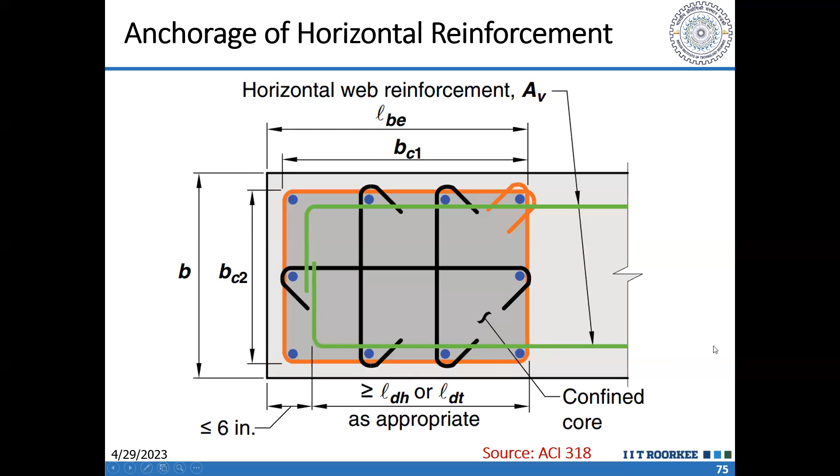Then out of plane bending of shear walls is another issue - whether we should consider out of plane bending in shear walls or not. People generally say that shear walls are planar elements, designed as planar elements. So if a shear wall building is properly proportioned, with no beams connected perpendicular to the shear walls, and we have adequate number of shear walls in both directions, the bending moment from analysis in the out of plane direction will be very small, which can be ignored.

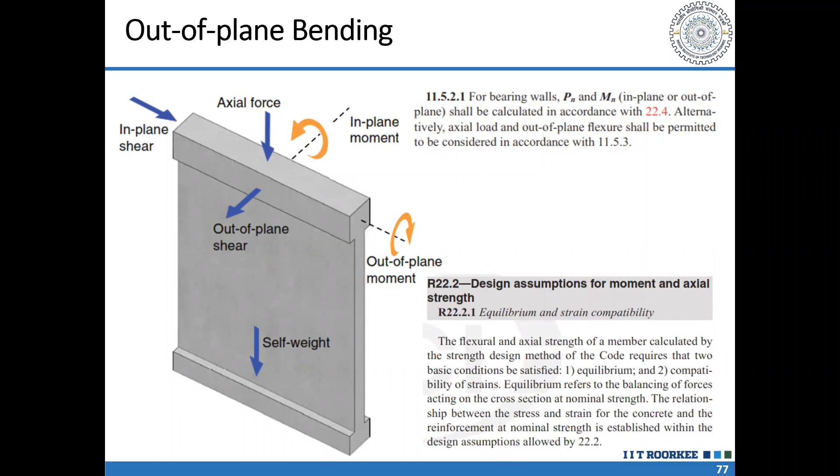But it is not that the shear wall should never be designed for out of plane bending moment. The shear wall should also be designed for biaxial moment in the same way as we design columns, especially when beams are connected perpendicular to the shear wall. When we have beams connected to shear walls perpendicular to its plane, the shear wall will be subjected to large out of plane moments also.

Whatever moments in out of plane we are getting from our analysis, shear wall needs to be designed for that. Then there are other issues regarding the connection of the beam or anchorage of the reinforcement of this beam perpendicular to the shear wall into the shear wall, because wherever the beam is crossing another column or shear wall, the embedment in the joint should be 20 times the diameter. So 20 times diameter should be the thickness of the shear wall. Shear wall may not have that much thickness.

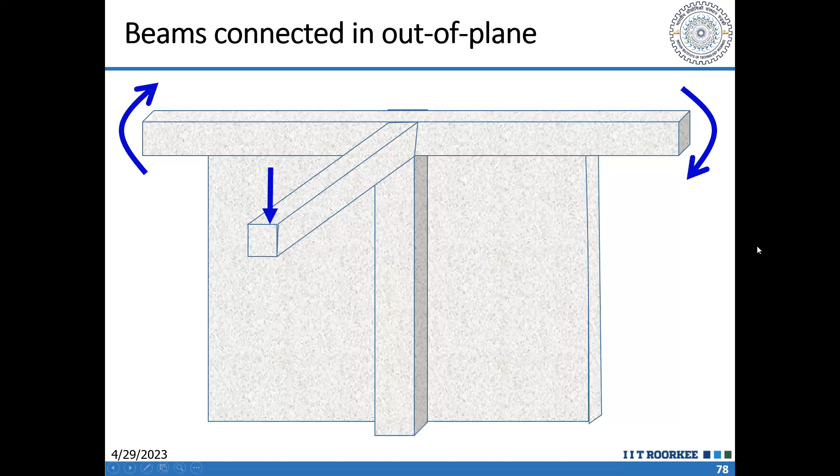So in that case, we have to make certain arrangement of the beams, integrated with the shear wall. Or rather, the cross section of the shear wall is to be modified in such a way that this requirement of 20 times diameter is satisfied. And the shear wall is designed for biaxial moment, and it can be designed using section designer in the same way as we are designing our columns for biaxial moments.

Then sometimes another problem is regarding the coupling beams. Sometimes the RCC coupling beams may not be adequate, and we have to provide either composite beams or steel beams. It is an acceptable practice now that we use coupling beams made of steel, and it has advantage because steel is having more ductility and is more ductile in shear. So if we are using steel coupling beams, which are subjected to very large shear, we will get good ductility. But we have to take into account, when using steel beams either embedded inside the RCC section or alone, the anchorage into the shear wall - this portion is critical.

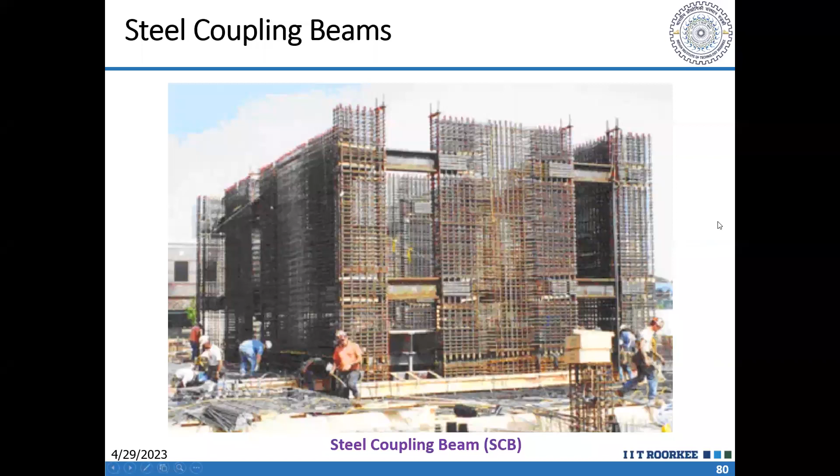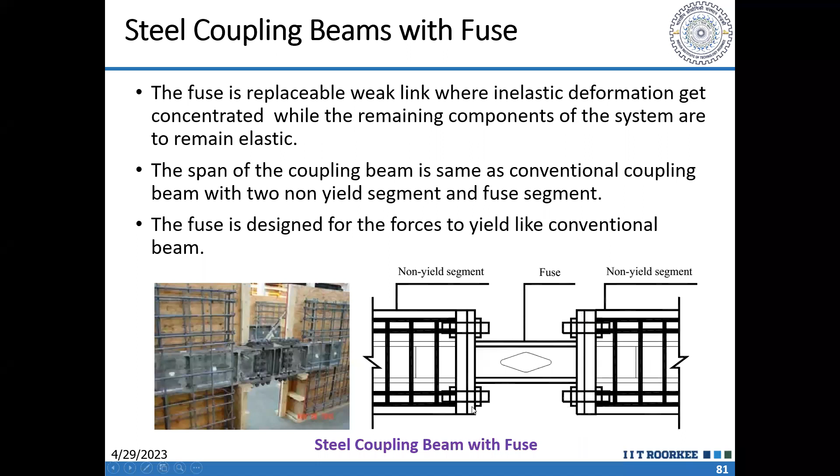This practice is also being used because if we are using RCC coupling beams, and those coupling beams get damaged during earthquake, they will be the first to get damaged in case of a coupled shear wall, so its replacement or repair will be difficult. In such situations, this may be a good solution.

Now this length of embedment in case of steel coupling beams is important, because when it will be subjected to bending or shear from this side, here we are going to have compression at the top, whereas here we are going to have compression at the bottom. We can consider the stress strain diagram or equivalent stress block, and this can be analyzed to determine this length LE, in such a way that the concrete here does not get crushed before yielding of this beam. Whatever is the capacity of this beam, the capacity of the concrete before crushing should be adequate.

Some expressions are available in literature. I have given this reference also. So how much should be this embedment length? About that, expressions are available. We can use that.

Now the detailing. This will be anchored in the boundary element, and the concrete, as we have seen, will be subjected to very high stresses and may get crushed. So that concrete needs to be confined. You can see how the confinement of the concrete is done. So an I-shaped coupling beam is used, and this concrete here is going inside.

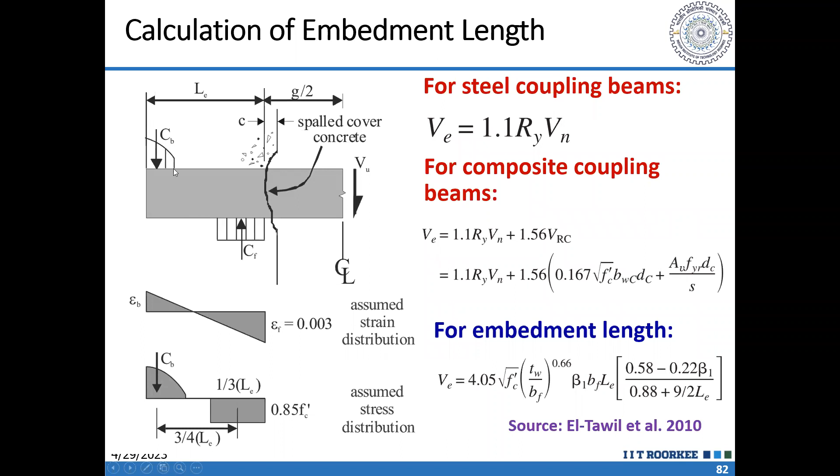Sometimes people are using plates in place of an I-girder. I do not know how they satisfy this condition, because the concrete below the plate will be subjected to very large stresses. A flange section is preferable because that flange section distributes the stresses in concrete over a larger area. If it was just a plate, the stress will be highly concentrated. So I don't know how it will work. I have not found any literature on this, but I am just raising a caution - when you are using plate, be cautious, look into the literature.

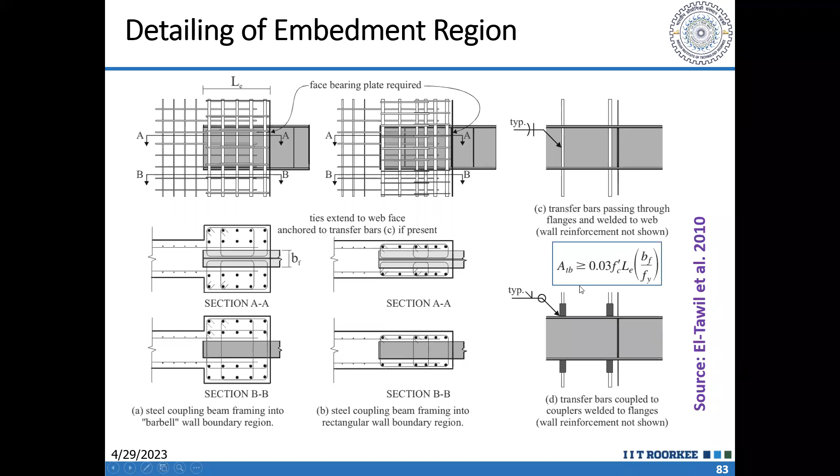Design of that is going to be difficult. Not only that, the ends of this girder should have anchor bars—2 anchor bars perpendicular to the length are to be provided here. These anchor bars can be provided either by making a hole in the flanges and welding this to the web, or a half coupler can be welded at the top and bottom of the flange, and then these bars can be provided with the coupler. Details of this are available in the same paper by El-Tawil, which can be referred for designing this steel.

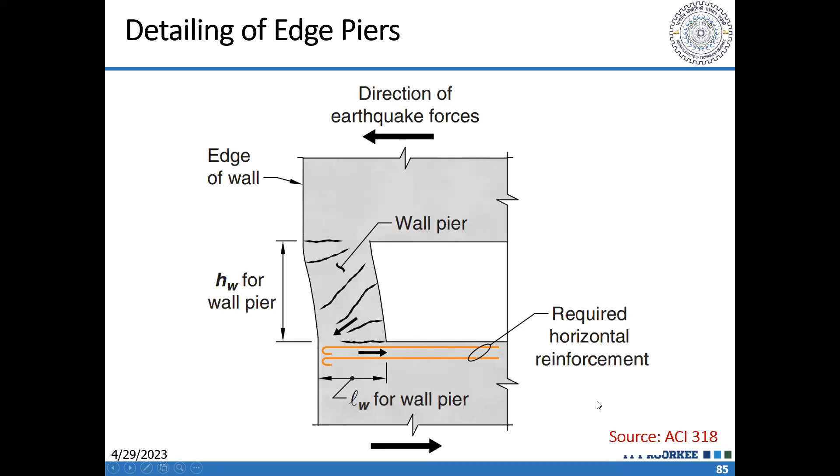The last point I want to discuss is when we have a small pier here, with an opening in the wall near the end of the wall. This pier will be subjected to very large forces and is going to crack. This reinforcement can slip because the force occurring in the shear wall will be transferred to this pier through this reinforcement. So this reinforcement should be adequate and adequately anchored. The corresponding detailing is available in ACI 318. I want to make you careful that wherever you reach such a situation, with a small pier by the end of a shear wall where the opening is located close to one end, this small pier also needs to be detailed properly.

So thank you, that's all I had thought for discussion today. We can take up the questions now. I will stop sharing my screen.

Okay, thank you Professor for the excellent presentation. We'll take up questions one by one, and Anand will also join me. We'll start from the last question we received and go upwards.

The question is: when to design shear wall as thin shell or thick shell? Thin shell or thick shell comes in during analysis—we can model them as thin shell or thick shell. Design will be done as a section, so like we design a beam or column, the same principle will be used for all shear walls, irrespective of their thickness. But modeling using thin shell is good enough, because thick shell is relevant when we are trying to determine the variation of stresses across the section. So even thin shell modeling is good enough for our purpose.

The next question is about dual systems. In dual systems, is it necessary that the frame be designed for 25% of total lateral load and the shear wall take 75%? The code is very clear about this. Why does this question come up again and again? Because people want to take advantage of the dual system in response reduction factor—the response reduction factor for dual system is more, and for shear wall it is less. So they want to take advantage of the larger response reduction factor. But my friend, nothing in this world is free. Everything comes with a cost, so you have to pay the cost.

Okay, next question: is it necessary to scale response spectrum base shear in service model? What is meant by service model? Because in case of earthquake, there is no service model, it is ultimate limit state model only. So perhaps they mean, for the purpose of satisfying interstory drift, whether we have to consider scaled base shear or unscaled base shear. This is the question, and this is a major issue.

When calculating displacement, we discussed that the shape of the acceleration response spectrum and displacement response spectrum is very different. With period, acceleration reduces, but displacement always increases. So when you consider a longer period in your model, the displacement is already on the conservative side, whereas the forces are not. The purpose of scaling the base shear is to account for the possibility that the period may be lower than what we are calculating, so that uncertainty is taken into account. So scaling is needed only for forces. There is no need to scale the base shear while checking interstory drift or deflection, because we are already estimating displacement on the conservative side.